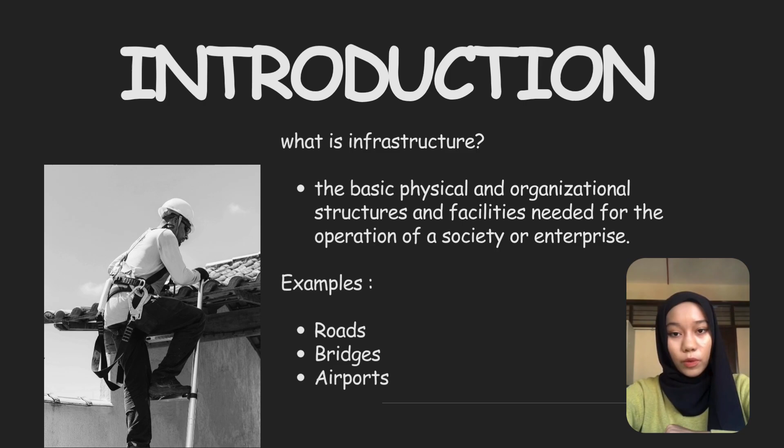Infrastructure is the basic physical and organizational structure that works and is needed for the operations and fulfilling society's needs, such as airports helping everyone to go from one place to another, roads, and also bridges.

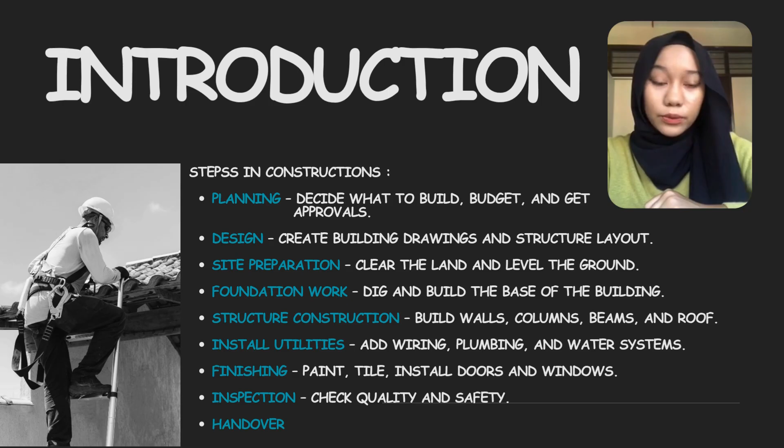There are a few steps in construction, such as planning, design, site preparation, foundation work, structure construction, installing utilities, finishing, inspection, and also handover. Now I will explain the construction stages of infrastructure.

First, we will go on to the pre-construction stage. First is the site investigation and feasibility study. We will assess the soil bearing capacity, water table, and also the foundation type, and ensure the site suitability for the proposed work.

We will study the potential site condition changes and conduct feasibility studies such as cost, timeline, and practicality. Next, we will do the design and planning approval.

We will finalize the house layout such as the structural and architectural drawing, and prepare the architectural, structural, MEP, and finishing drawings. Then we can obtain approval from district authorities and develop the timeline and cost estimation.

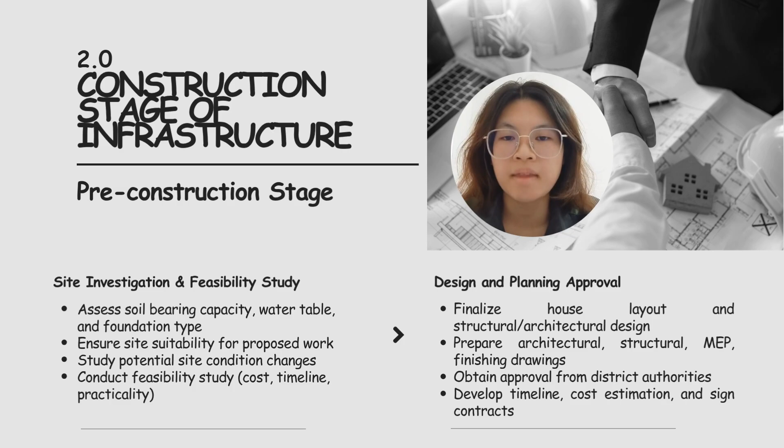We also get the signed contracts. Next is the construction stage.

By setting out an excavation, we mark the layout with peg lines and set the benchmark, excavate the foundation, set formwork, place steel, and pour and cure the concrete.

Next, for superstructure work, we will cast the ground floor columns and begin with beam and slab reinforcement, and we reuse the shuttering material for efficiency.

We also do roofing works in the construction stage by installing the trusses on walls and columns. We fix tiles, sheets, shingles, and waterproofing, and install gutters and drainage.

For the internal and structural work, we install external walls, internal walls, leave the door and window gaps, and also apply plaster.

We install MEP, which is mechanical, electrical, and plumbing, waterproof the wet areas, and do the flooring and interior finishings.

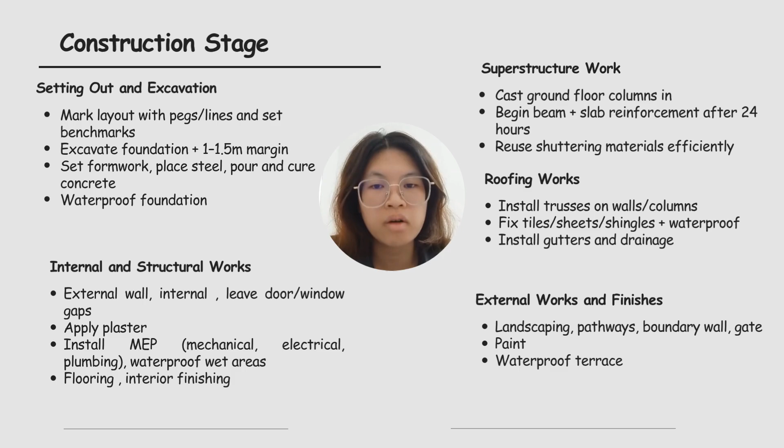Lastly, in the construction stage, we do external work and finishes, such as landscaping, pathways, boundary walls, gate painting, and also waterproofing the terrace.

Last is the post-construction stage. In this stage, we will test and inspect all systems, rectify the defects, clean and hand over documents, and get ready for occupation.

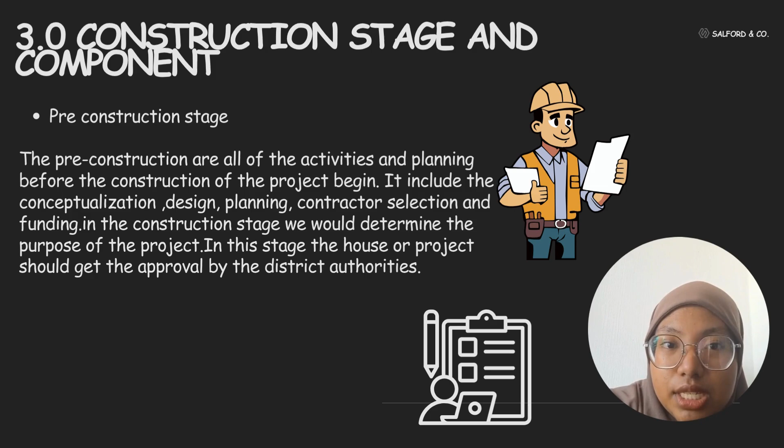In this stage, we would determine the purpose of the project, and the house or project should get approval from the district authorities, for example the fire department and others.

The second stage is the construction stage for substructure work. Based on the information gathered during the site visit, engineers must choose the kind of foundation to be utilized on the building site.

In a construction project, it is necessary to choose between deep and shallow foundations depending on the size of the building structure, the characteristics of the soil, and the project construction budget.

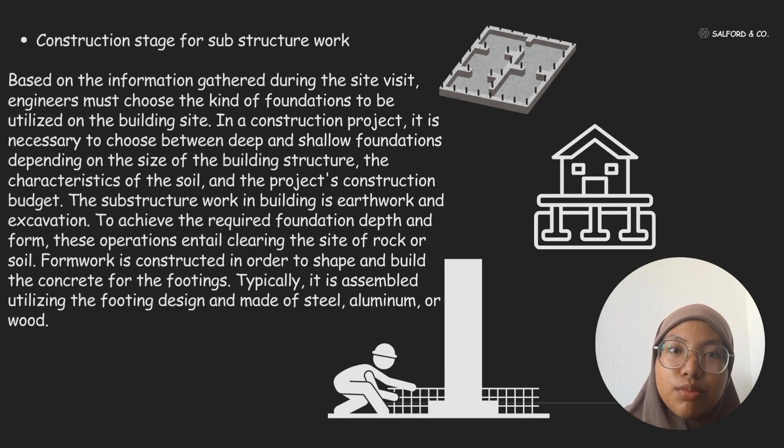The substructure work for a building includes earthwork and excavation. To achieve the required foundation depth and form, the operation entails clearing the site of rock or soil. Formwork is constructed in order to shape and build the concrete for the footing.

Next is the third stage, which is the construction stage for superstructure work. This phase includes all the construction work above the ground level.

Forming the main body or skeleton of the building begins after the plinth level is completed and the substructure is fully in place and stable.

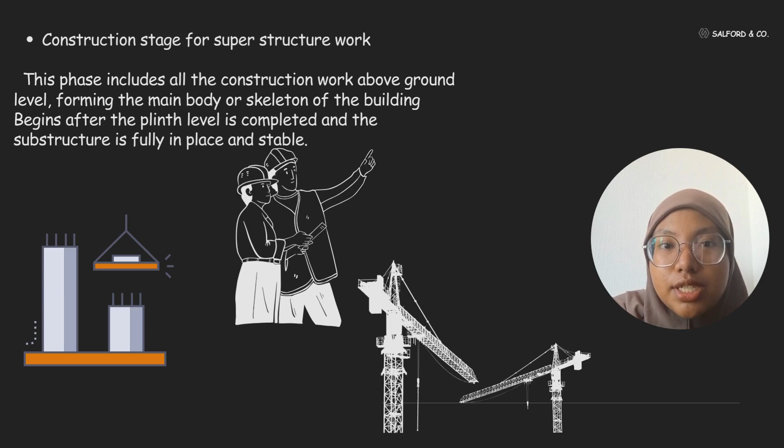The last stage is the post-construction stage, which is the final phase of construction. It focuses on the internal finishes, external surroundings, safety checks, and preparing the building for occupation.

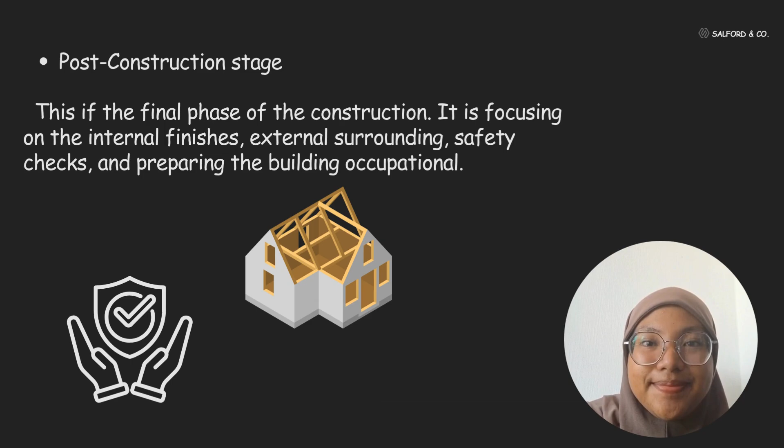In my part, I will present about the reproduction of construction sequence. The purpose of this sequence is to ensure that the entire building process is systematic, safe, efficient, and cost efficient. It also helps to organize the tasks in the correct order, and prevents confusion and rework on site.

The method of ground marking is the process of transferring the building layout from construction drawings to the actual ground. It ensures the accuracy and alignment of the building structure and reduces errors before costly excavation.

The procedure for conducting ground marking: Step 1, the site is cleared. Step 2, the reference point is set up. Step 3, the corners and lines are marked.

Step 4, string lines are stretched between pegs for outline walls and foundation. Step 5, double-checking measurement is undergone to ensure the layout matches the plan's dimensions precisely. The last step is the width and position of trenches are marked for footing excavation.

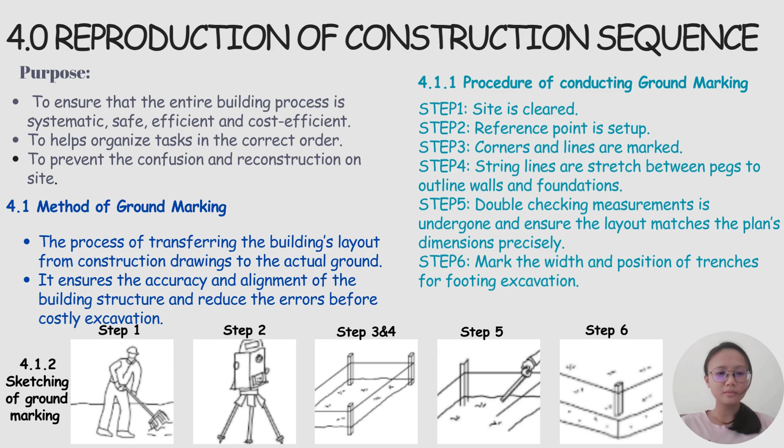The second method in the construction sequence is foundation work. The foundation is used to transfer the load of the building to the ground safely and stably. It can prevent uneven settlement that could cause the slope to collapse, and ensures the building does not sink unevenly into weak soil.

The procedure for conducting foundation work: Step 1, excavation is undergone with trenches dug to the required depth and width. Step 2, the bottom of the trench is leveled and a layer of sand or gravel is placed and compacted. Step 3, a 75 to 100mm thick plain cement concrete layer is poured.

Step 4, steel reinforcement bars are placed in the trench. Step 5, wooden or steel formwork is fixed to shape the foundation. Step 6, concrete is poured over the reinforcement and a vibrator is used to remove air pockets. The last step is the trench is filled with selected soil after the foundation gains strength, and compaction is done in layers to prevent settlement.

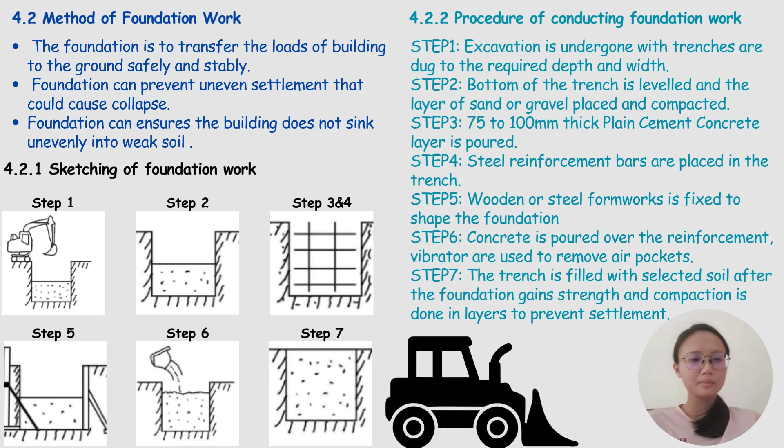The third method in the construction sequence is superstructure works. Superstructure work is constructed above the foundations and includes walls, columns, beams, floors, roofs, doors, windows, and finishes. It also creates usable space while ensuring structural stability, safety, and functionality.

The procedure for conducting superstructure work: Step 1, the foundation is extended with reinforced concrete columns. The beams are cast to tie columns and support the slabs.

Step 2, cement mortar with a ratio of 1 to 6 is used to build the block masonry walls, and a bonding pattern is followed for strength. Step 3, for the openings of doors and windows, frames are fixed in place during masonry, and lintels are cast over openings for load transfer.

Step 4, the roof slab is constructed by setting up formwork, placing reinforcement as per design, and pouring concrete. The slab is cured for 7 to 14 days to increase its strength. The last step is parapet walls are built above the roof for safety.

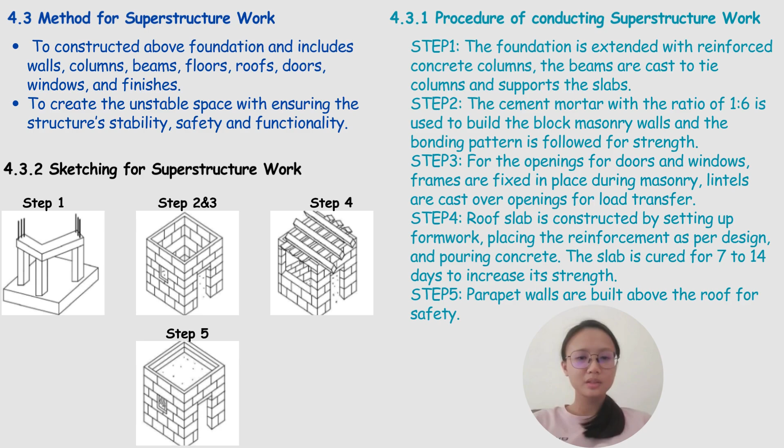Another method in the construction sequence is internal finishes. Internal finishes enhance the functionality, aesthetic, durability, and comfort of a building's interior space. They also protect structural elements from moisture and damage, extending the lifespan of building components by preventing deterioration.

The procedure for internal finishing work: Step 1, the wall is finished by applying cement plaster with a ratio of 1 to 5 in 2 layers. Apply white cement-based putty for smoothness, and use water-based emulsion for interior spaces and oil-based emulsion for kitchens and bathrooms. Step 2, the ceiling is finished with smooth plaster and fungal-resistant paint to ensure crack-free joints and level alignment.

Step 3, for wet areas, the base is screeded with a slope and tiles are laid using mortar, with grouting set afterward. Step 4, the doors, windows, and skirting are installed.

The last step is electrical appliances and plumbing fixtures are installed, such as switchboards, lights, ceiling fans, and appliances being mounted and connected. Plumbing fixtures such as wash basins, toilets, taps, and kitchen sinks are securely installed and tested for leaks.

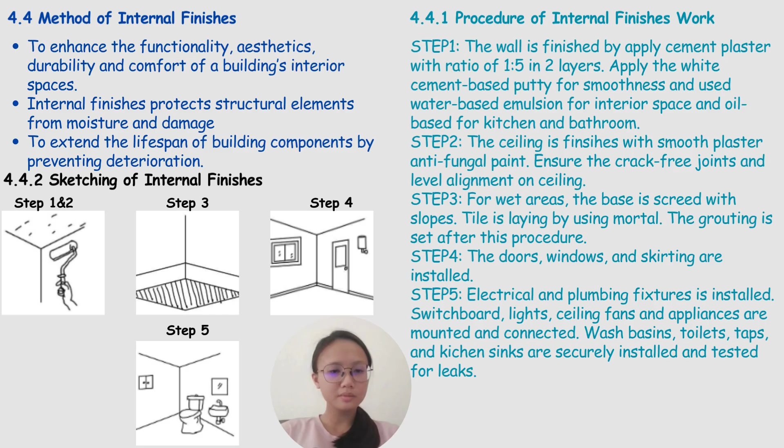Now I will explain the current new and improved technologies. The growing need for efficiency and safety has led to a substantial evolution in building and construction technologies over time. The construction sector is constantly looking for new, modern, and innovative ways to increase efficiency and meet today's growing demands.

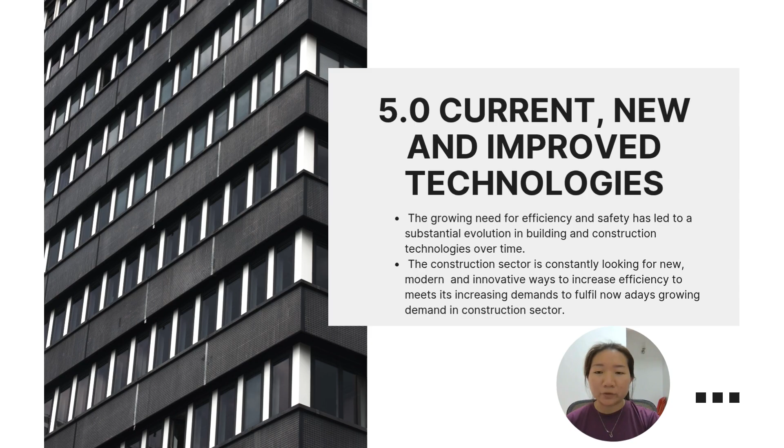The first current new and improved technology is 3D concrete printing. This is a digital fabrication process where concrete or cementitious material is printed layer by layer, similar to how 3D printing works with other materials. It involves layer-by-layer deposition using a robotic arm and gantry system to deposit the concrete.

The benefits of 3D concrete printing is it can help to reduce construction time, reduce cost, reduce waste, and also creation of complex and custom shaped structures.

Second, augmented reality (AR) and virtual reality (VR). AR is known as a technology that overlays real-time 3D rendered computer graphics onto a portion of the real world through a display, while VR creates a fully immersive virtual environment in which an engineer is able to explore the materials and building layout in real time. It can help to improve collaboration, enhance visualization, provide a realistic sense of space, material, and structure layout, and it can help in real-time data access.

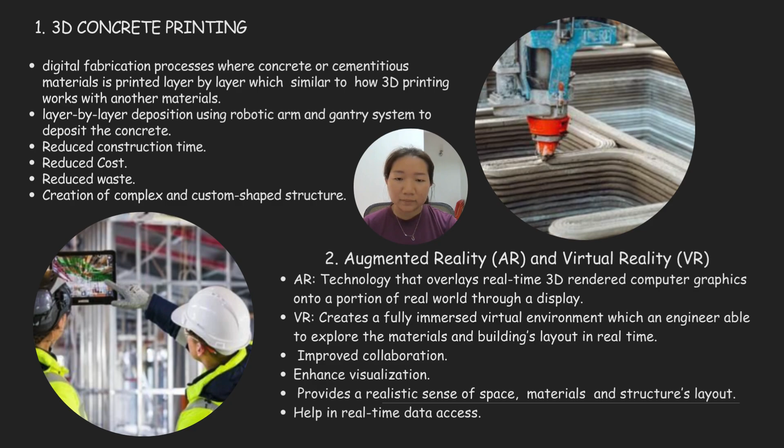The third current new and improved technology is drones. Drones are a tool that provide aerial footage and also 3D maps of construction sites. Drones can help in surveying, monitoring, and ensuring safety. They improve project productivity and project outcomes. Drones allow for precise measurement, streamlining inspection, and also real-time data capture.

It helps in cost reduction and allows for regular progress tracking, potential issue identification, and adjustment to the schedule. The fourth current new and improved technology is building information modeling. It is a collaborative platform for stakeholders to work together more efficiently. This 3D modeling technology allows for creating a virtual representation of a building's physical and functional characteristics throughout its life cycle before it is constructed, giving a better understanding of space planning, design, construction, and management. It can help to enhance coordination and ensure the streamline is done smoothly and efficiently.

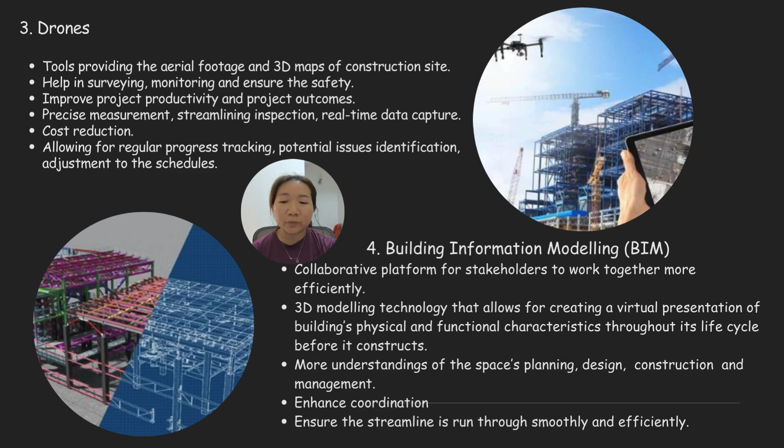While constructing a project, there are a few problems and issues that occur at the site, such as soil problems. As we all know, our project location is on clay soil, and this has been affecting the construction in many ways, such as low bearing capacity, because heavy loads could not be supported efficiently. Thus, in order to proceed with the project, we have to get proper treatment for the soil to avoid settlement leading to structural failure.

The second problem and issue that occurs at the site during construction work is limited access. Our construction area is very small and limited, and also in a closely packed residential area. Therefore, it is quite hard for workers to bring big vehicles carrying supplies such as steel, bricks, cement, and concrete from outside to the construction site. Therefore, what they have to do is unload all the material and stuff from a far distance, which causes project delays.

The third issue that occurs at the site is weather delay. During earthwork, foundation laying, concrete pouring, and plastering, the work has been affected due to this. This is because weather conditions such as heavy rainfall, thunderstorms, and strong wind have been disturbing the construction work, such as freshly laid brickwork and cement being harmed by the weather, and curing has been delayed, also causing waterlogging at the site. Therefore, before starting construction, we have to check the weather forecast for the site on that day before proceeding with the construction work.

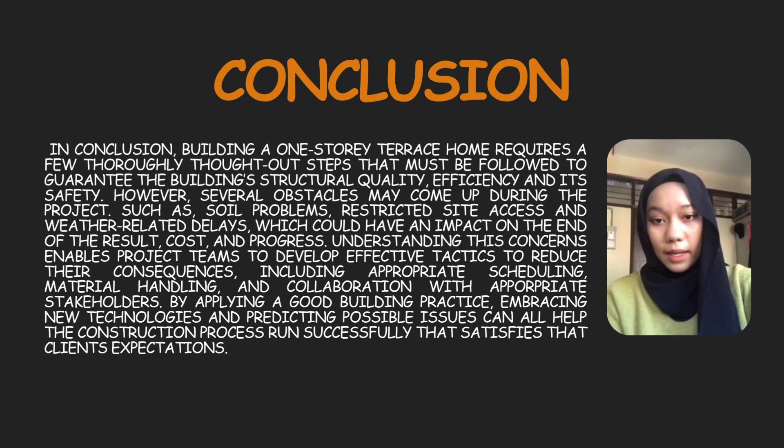Therefore, we could conclude that building a one-story terrace house needs careful planning in order to ensure the house is strong, efficient, and safe to use. Some of the common problems discussed earlier, such as poor soil condition, limited space at the site, and late projects due to weather, are known to be some of the reasons that affect the project and increase the costing, stress, and final result of the construction work. Therefore, it is crucial for a civil engineer to have a properly scheduled plan and use good building practice, technology, and planning in order to construct a good project.

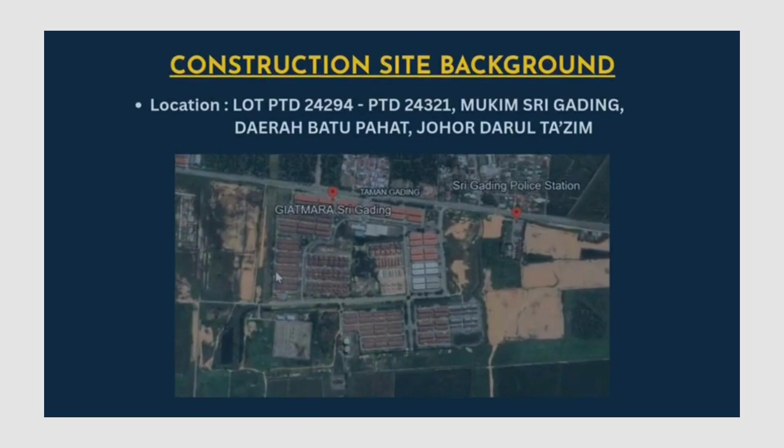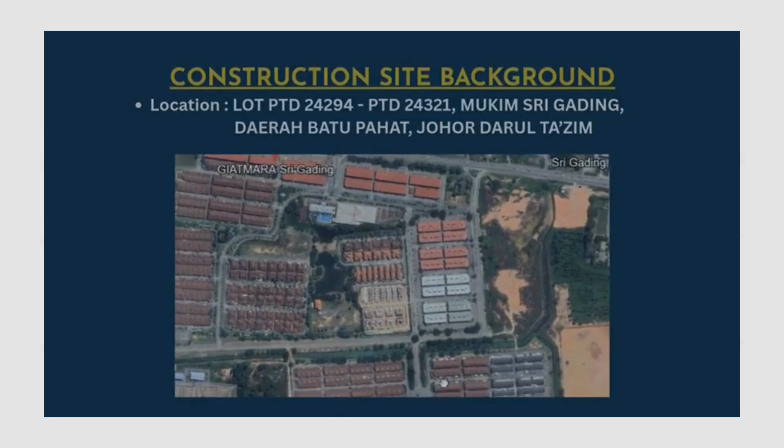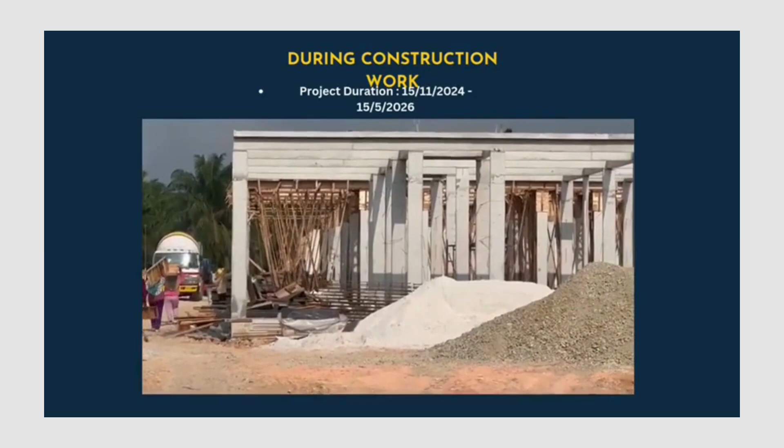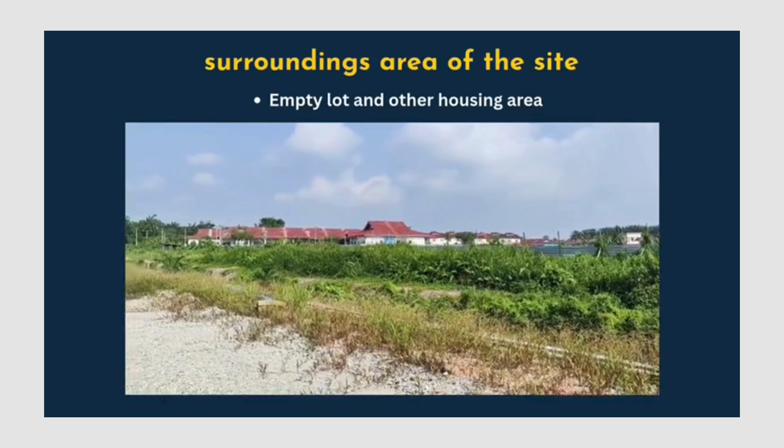For the construction site background, the location we have chosen is at lot PTD 24294 until PTD 24321 in Mukim Sri Gading, Daerah Batu Pahat, Johor Darul Takzim. The project duration for the construction work is from 15 November 2024 until 15 May 2026, and since it is now already 2025... it is a single-story terrace house design. As for the surrounding area of our site, there were a lot of empty lots and other housing areas, and also an empty lot for other construction.